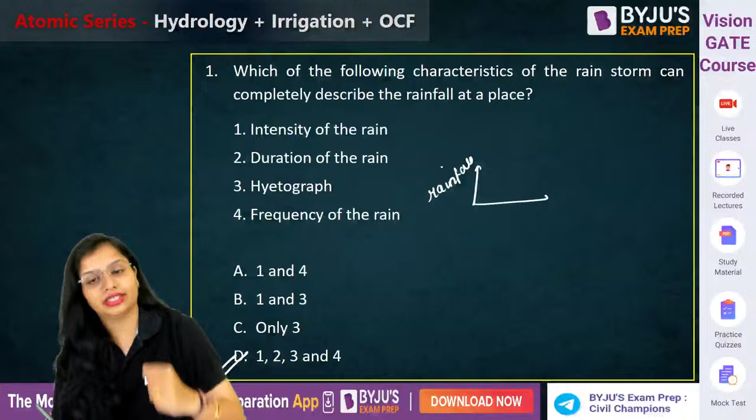Okay, now moving to the next question. This is a calculative question. A catchment has an area of 100 hectares. Runoff coefficient is given to you as 0.4. Generally, runoff coefficient will take it as 0.4. Due to a 5 centimeter rainfall event, the stream flow at the outlet lasts for 10 hours.

It is asking you the discharge, the average stream flow. Come on guys, it is asking you the discharge. That answer is correct. Now give the answer for this. Come on guys, you have to answer, you have to give the BARC, not me.

मेरे को नहीं देना पेपर, आपको देना है. Come on, quick, quick, quick. You have to give the paper, guys, not me.

अब देखो, अगर मुझे stream flow चाहिए, I need to know how much amount of runoff is taking place. In the question, it has given me rainfall. Now you know that runoff coefficient is equal to runoff upon rainfall. Runoff coefficient is 0.4, rainfall is given to you as 5 centimeter. Now this is runoff, I don't need the depth, I need the volume.

So what I'll do is I'll multiply 5 centimeters, converted into meters, by the area, that is 100 hectares. You know 1 hectare is equal to 10 raised to power 4. Solve it, you will get the runoff. How much is it coming? It will come to 2 into 10 raised to power 4 meter cube.

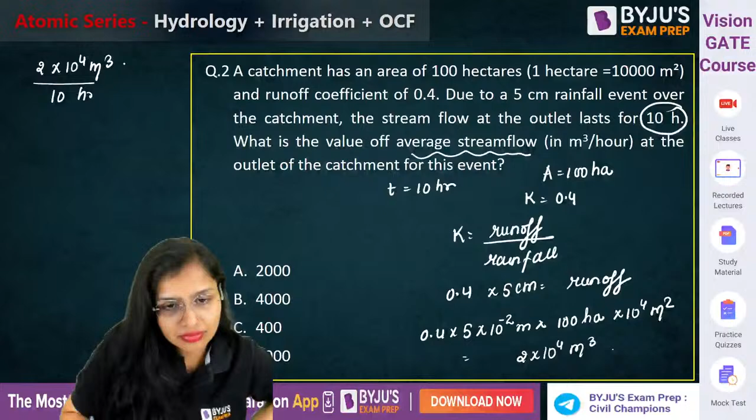Solve it. How much will be the answer coming? 2000 meter cube per hour. As simple as that.

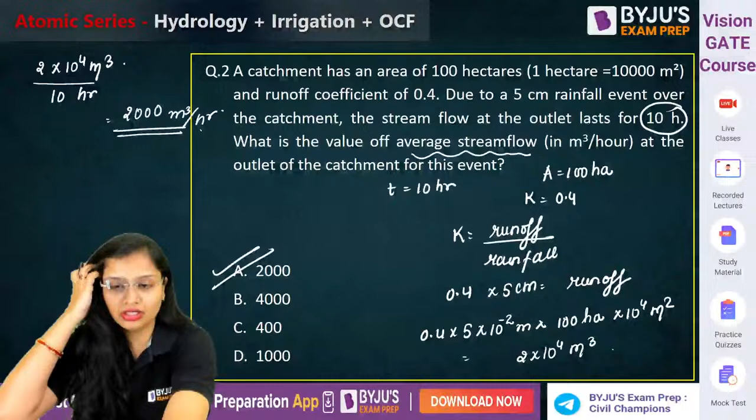So this can be asked, and here you don't need a calculator also. If you have slightly good mathematics, you will be able to solve it.

Now this is a good question. It doesn't have multiple answers. Because in BARC you will be getting only MCQ.

Which of the following curves are true for DAD analysis? Depth, area, duration curves. Come on guys. I told you at a stretch you cannot analyze all three things.

So when you take the variation of two parameters, you keep the other one constant. Come on guys, solve it. Very good Jagriti, very good. So the answer will be both A and C.

Let's check it out. If the area is fixed, and if you are increasing the duration, the rainfall depth will increase. Obviously, if I am talking about 1 hectare area, and 2 hours of rainfall took place, 4 hours of rainfall took place, then obviously the amount of rainfall in 4 hours will be more compared to 2 hours. So this is correct.

Now this doesn't make sense. Now C1, here what is happening? Average rainfall depth and area. Again same thing - when you are increasing the duration, the rainfall depth will increase. So both A and C are correct.

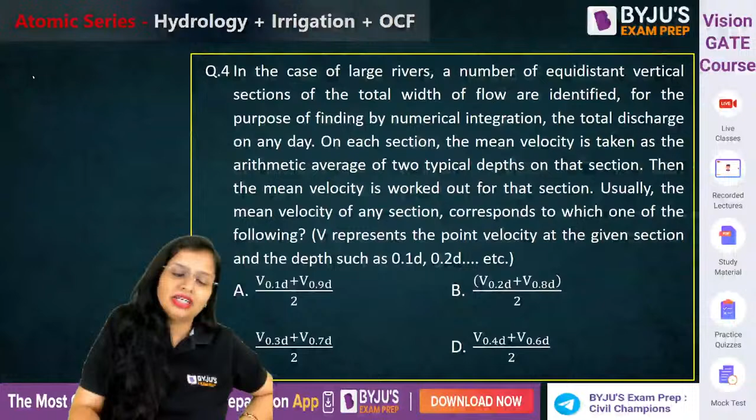Mean velocity is the arithmetic average - at 2 positions you will take the depth and then do the arithmetic average. Now it is asking what will be the mean velocity at a particular section. Come on guys, how will you calculate the mean velocity, or average velocity? I told you for shallow streams, generally when the depth is less than 3 meters, average velocity is given by finding the velocity at 0.6y depth.

And when it is moderate deep streams, you will calculate it at 0.2d and 0.8d depth, take the summation and do the average. So B will be the correct answer. Correct?

Oh my God. It depends - I will never say easier than GATE, difficult than GATE, or equivalent to GATE. I never said it is much easier than GATE. Never. Now this question, this is a good question.

What about option D? You're asking about this one. For option D - A is also correct, C is also correct, Nagesh. B is not correct. If you check it according to this, as you see here, just check it out - if you take the same depth, area needs to be constant for me.

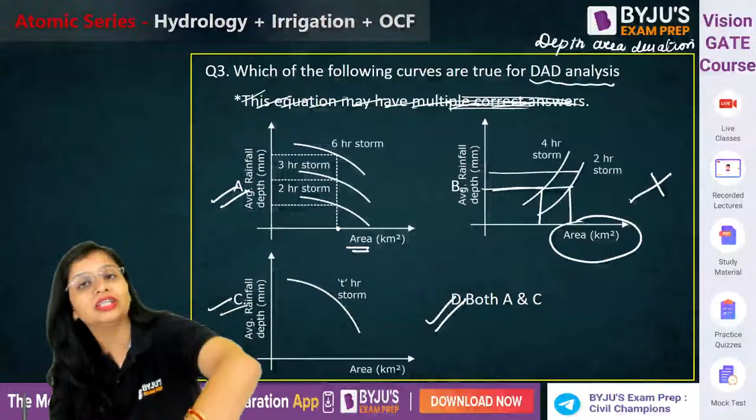Here area is not constant and you're measuring rainfall depth which is also varying, duration is also varying - that's not how it works. You cannot analyze all three things at a stretch. You will keep one thing constant and check the variation of the other two parameters. This is what you do.

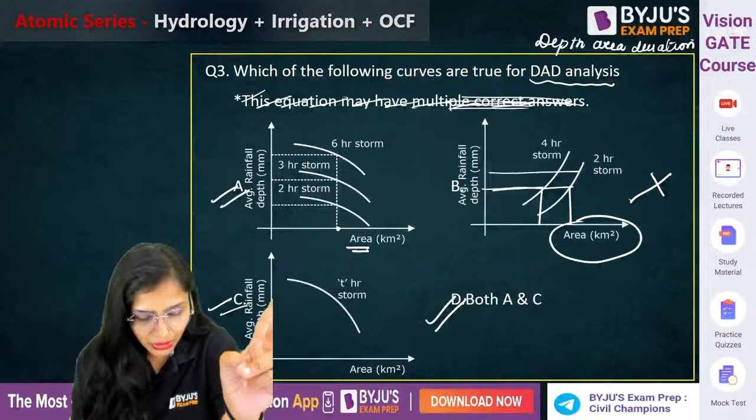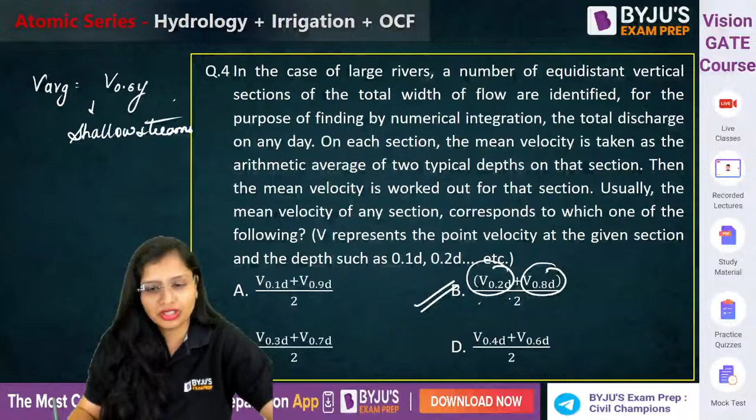In case of D - is D not correct? You calculate at 0.6y depth, 0.2d depth and 0.8d depth. That's not how it works. For shallow streams, this is the one, and for deep streams, this is the one. Option D is never correct.

Now this one - the velocity of the stream flow when measured using a current meter at point A is found to be 5 meter per second, with revolution given as 50 revolutions per second. And at point B, the velocity is 3 meter per second and it is 40 revolutions per second.

The velocity of the stream at a section 50 centimeters downstream of point B, where revolutions is given as 60 revolutions per second - tell me what the velocity will be. This is a very simple question.

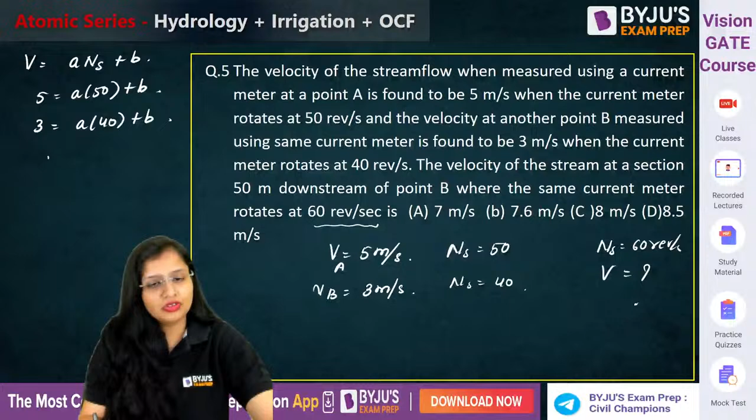Solve it - in the exam also you have to solve it yourself. Also you will solve. Check it out. Give 1/5 and this will come out to be -5. Just check it once.

But it has asked you the velocity when the revolutions is 60 revolutions per second. A is 1/5 revolution, 60 revolutions per second, and this is -5. Solve karo - 60 by 5 is 12, 12 minus 5 is 7.

Simple, this question is simple. Any doubt? Nagesh, Jagriti, any doubt, anybody? Clear? Is this question clear to everybody? Come on, quick, quick, quick.

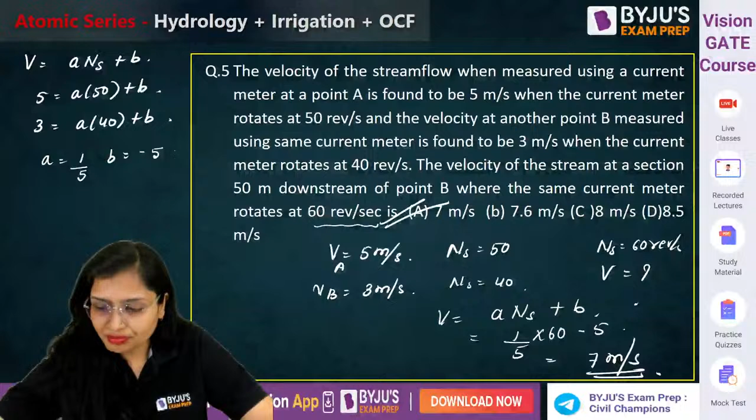Okay then, we'll start with the next question. A catchment has 4 rain gauges installed. Annual average rainfall given to you is 110 centimeter. Standard deviation given to you is 25 centimeter. Error given to you is 0.10.

It is asking you the additional number of rain gauges. Additional means extra, so for calculating additional, first you need optimum. So the formula for optimum is N equals CV upon epsilon whole square.

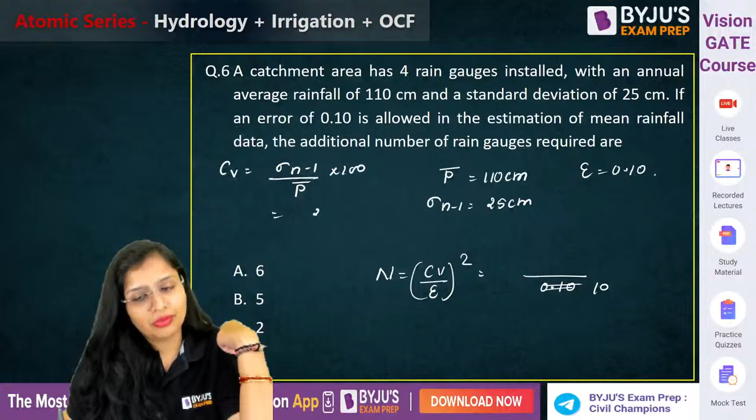Allowable error is 0.10, or if you want to write in terms of percentage, you can write 10%. Now you need to calculate coefficient of variation: 25 divided by 110 into 100. How much is coming, coefficient of variation guys?

22.78. Remember, if I am taking this in percentage, I have to take allowable error also in percentage. Don't do one as percentage and one in decimal - you will get the wrong answer.

So this is 10 and here is 22.78 whole square. How much is it coming? Guys, you have to solve it also. This will come out to be 5.16, so you will round it off to the higher side, that is 6.

So 6 we required, right now we have 4, so how much additional we require? 6 minus 4, that is 2. Correct?

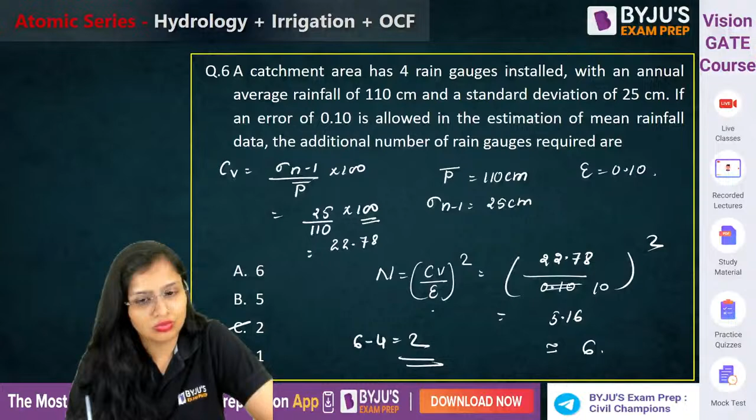Now question 7 - don't have calculators, okay, now this question. Rainfall intensity is given to you in mm per hour, but the duration of each rainfall intensity is half an hour. Now here they have given you the runoff volume and catchment area and it is asking you phi index.

I have told you whenever they ask you phi index, first you need to calculate W index. Now W index, you know, it is precipitation minus runoff by time.

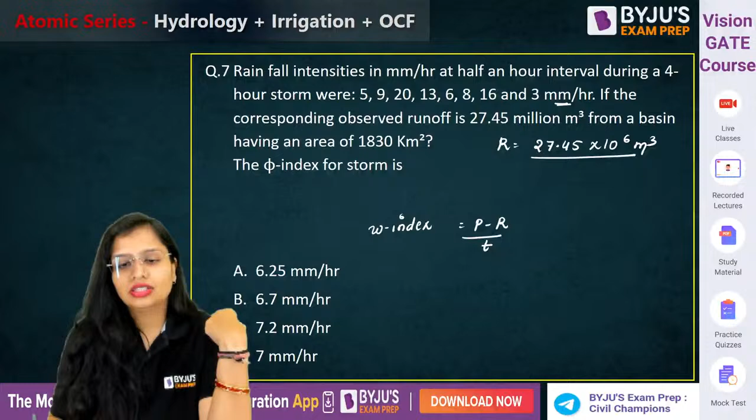So now first let's calculate runoff. 27.45 million means 10 raised to power 6, and 1830 square kilometer - so convert it into meters. Solve it, how much are you getting the runoff? Pehle runoff bata do - solve it and tell me the value of runoff.

Runoff you got, precipitation: 5 plus 9 plus 20 plus 13 plus 6 plus 8 plus 16 plus 3. This is in mm per hour, and duration intervals half hour. Solve it - kisi ka aaya? Precipitation, tell me the value of precipitation also.

80 it will come - half of 80 isko plus karoge. When you'll add it, you will get 80, half of 80 is 40 mm. So W index: 40 minus 15, and how many - 1, 2, 3, 4 - 4 hours. So this will give you the value of W index in mm per hour.

Calculate and tell me kitna aa raha hai W index - pehle aapko W index nikalna hi padega, you need to calculate W index first. How much will it come? 6.25 mm per hour - this is W index.

But in the question, it is not asking me W index, it is asking me phi index. Phi index is hum woh precipitation lenge jo runoff produce karta hai - average precipitation above which rainfall volume is equal to runoff volume. So any value which is less than 6.25, you will not take that.

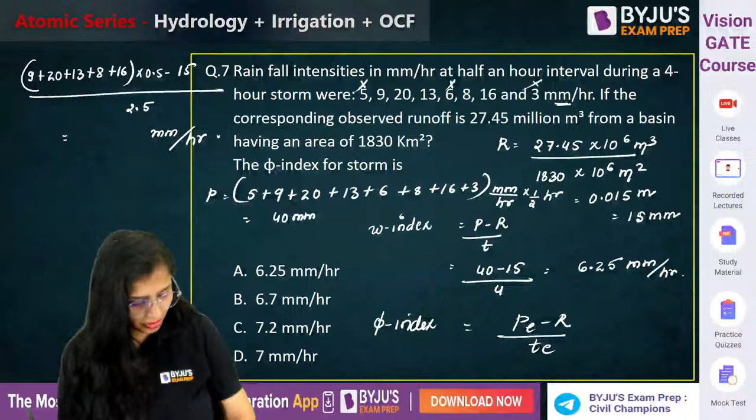Come on, kitna aa raha hai? 563 kya hua - achha usko you are neglecting that. Okay, solve this and tell me how much it is coming. This will come out to be 7.2 mm per hour - is it coming that much? 7.2 mm per hour - isko 0.5 se multiply nahi kiya because it is half an hour interval.

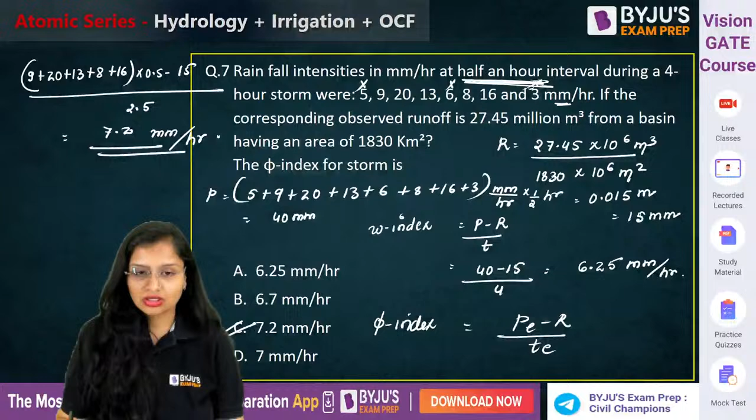Jagriti, sure, okay, now this question - a good question. Come on, solve this question, I'll add one slide by that time.

Chalo. A stream discharge is calculated by dilution technique. If a 25 mg per liter of a fluorescent tracer was discharged into a stream, I'll take it as C2. Some tracer or dye is discharged at a constant rate of 10 meter cube per second.

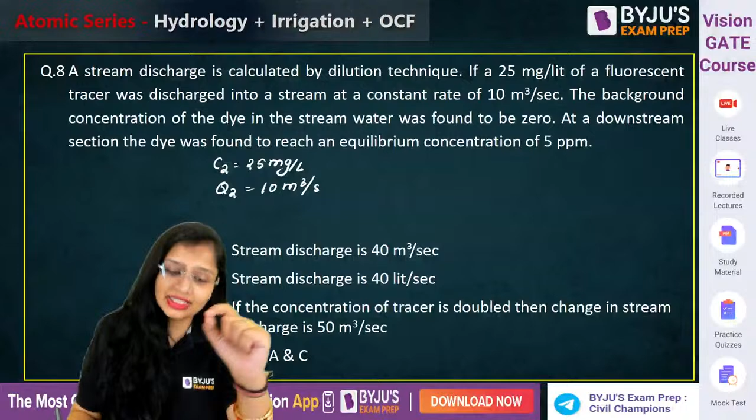And the concentration of tracer which was already present in the stream before is zero. At a downstream section, this is the discharge of the stream which you need to calculate. The concentration of the tracer which is present is 0. Q2 is the rate you are adding and C2 is the chemical.

So here you will get the concentration as C, and equilibrium concentration is given as 5 ppm, that is 5 mg per liter. Firstly it is asking you the stream discharge, meaning it is asking for Q1. Now you know the continuity equation, I can write it here. Q1 C1 plus Q2 C2 is equal to Q1 plus Q2 into C.

Now you know everything, you can just substitute it and you'll get the answer. This will become 0 because C1 is 0. Q2 is 10, C2 is 25, and this is Q1 which you need to find. This is 10 and this is 5. Solve it and tell me the value of Q1. Come on guys, solve it and tell me the value.

Come on, quickly. 5 ones and 50, 50 minus 10, 40. That's how it comes out. It's this simple, so stream discharge is 40 meter cube per second.

It's not liters per second. But here guys, kindly read the question. Now it has played a bit of a game with you. You saw stream discharge is 40 meter cube per second, you're like oh my god I got the answer, and you'll move to the next question. Kindly read statement C.

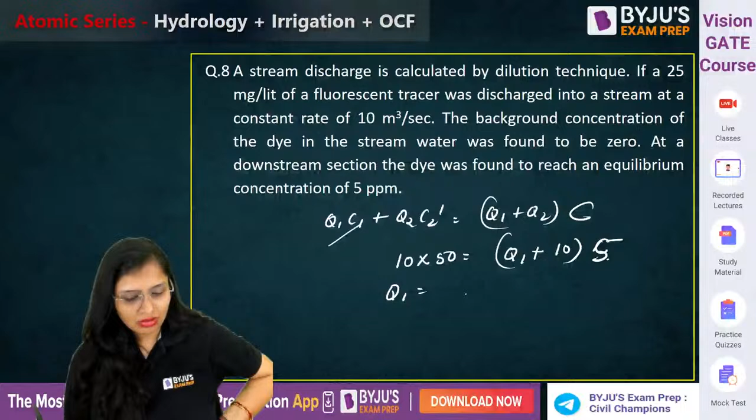Now this will be 0 because C1 is 0. Q2 is 10 meter cube per second, and this is 50. Come on, calculate Q1. Come on, calculate Q1 again, you have to calculate it again. Come on, quick, quick, quick.

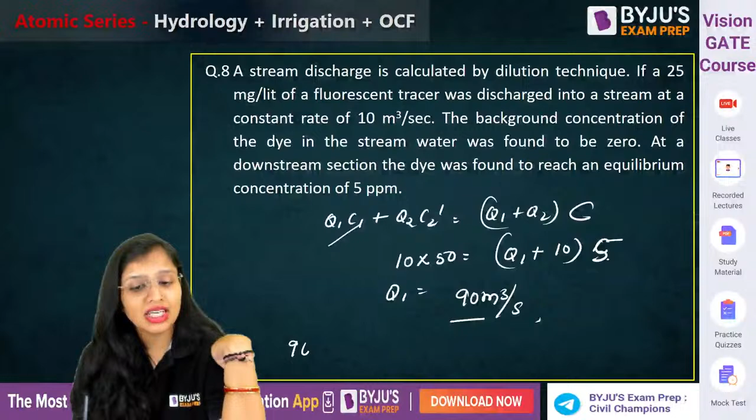This time it will come out to be 90 meter cube per second. Okay, now check it out. Initially it was 40 meter cube per second, right now it is 90 meter cube per second. In the question it is asking you the change in stream discharge.

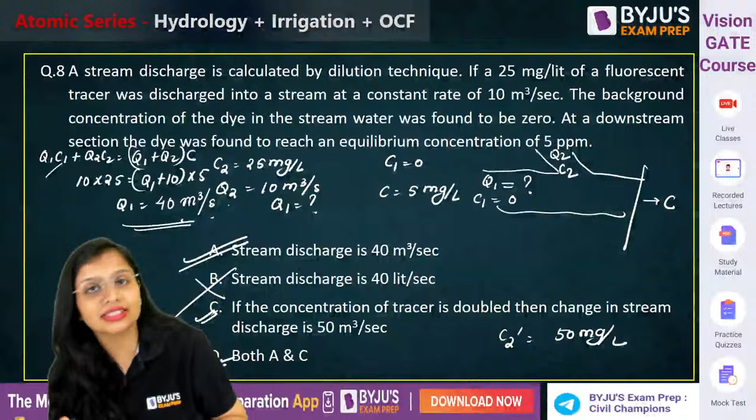So change in stream discharge will be 90 minus 40, that is 50 meter cube per second will be the change in stream discharge. So C is also correct, and I told you we don't have multiple select questions here. So here the answer will be D, both A and C. So guys, this question teaches you that if you are getting one answer as correct, kindly read the other statements also, don't skip that question in a hurry. Otherwise 1 mark will be negative, you won't get the 3 marks and 1 mark will be negative.

Alright, this question: the infiltration capacity of a soil follows Horton's equation, it is given to you. It is asking you first the total depth of infiltration, and then average infiltration rate for the first 40 minutes. So it is asking both things. Come on, how will you do it?

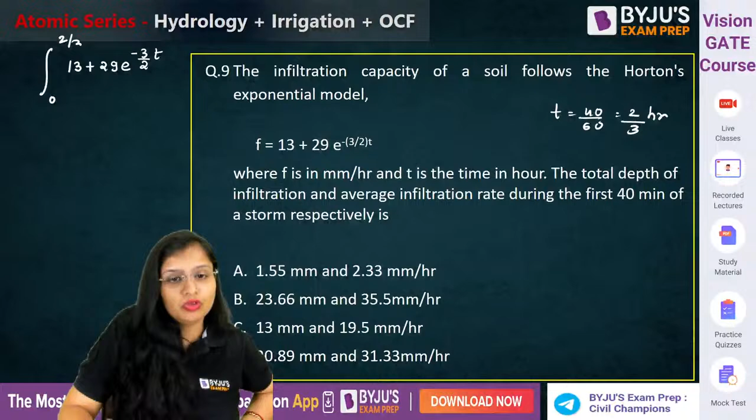Come on guys, first there's 40 minutes, you know everything is in mm per hour. So 40 minutes converted into hours is 40 by 60, that is 2 by 3 hour. So this will become from 0 to 2 by 3 because you need to find the cumulative value, so now you'll integrate this. So integration of 13 dt is t.

Now you should be so pro because I don't think you are a beginner now, right? So you should be able to solve it in a single line. 3 by 2 into 2 by 3 minus...

Come on, solve it, you will get the value in mm. 23.66. Are you sure? Just check it again, 23.66 or 20.89. Check it, Viren, Jagriti, just check it again. 23.66 or 20.89, quick, quick, quick, waiting.

So what will the average infiltration rate become then? Just check it out first.

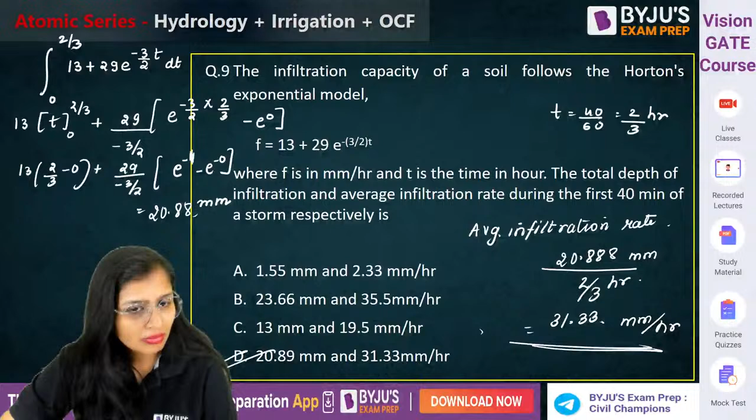An 8-hour storm with incremental rainfall during each successive hour is given to you.

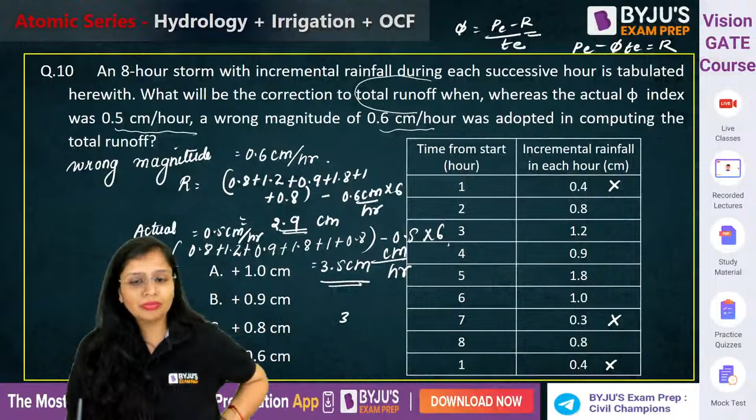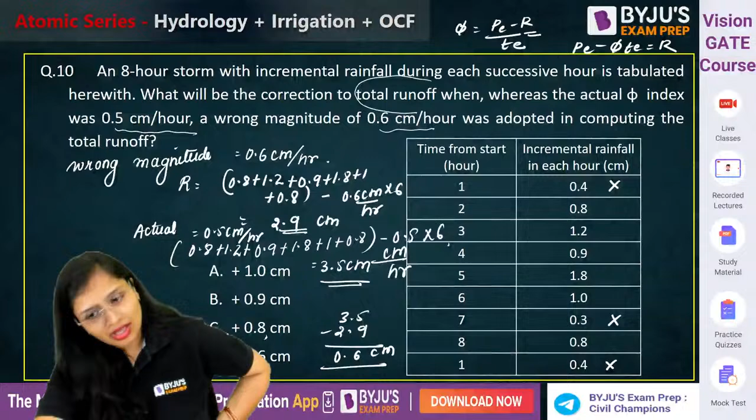Clear? Chaliye. Now moving towards irrigation, then open channel flow is also there and building materials is also there.

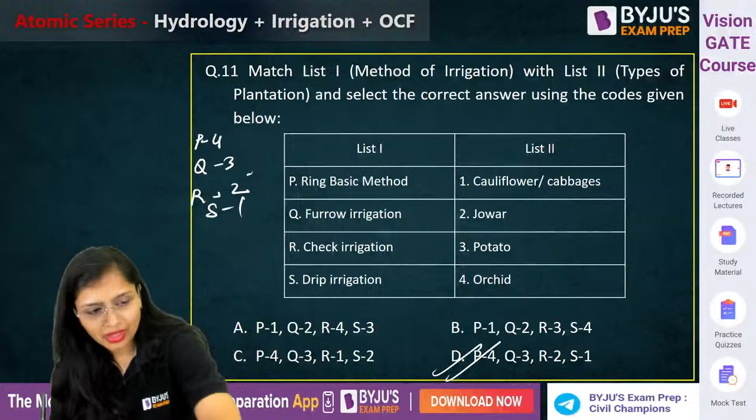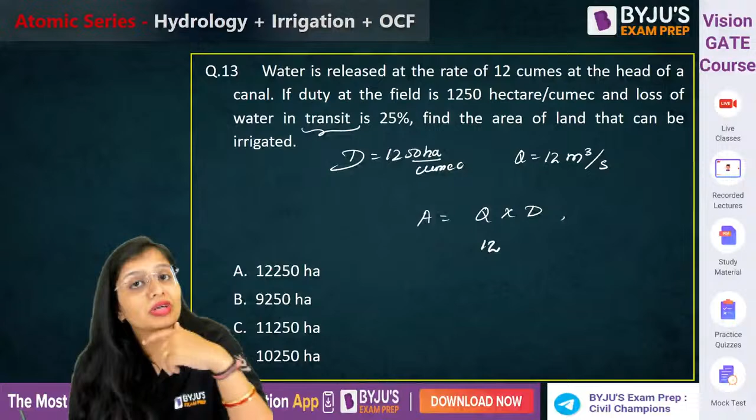See, 12 cumec was released, but 25% is lost. So how much is remaining? 75%. And that will be in meter cube per second, that is Qmax. And how much is the duty? 1250 hectare per cumec. Solve it. How much is it coming?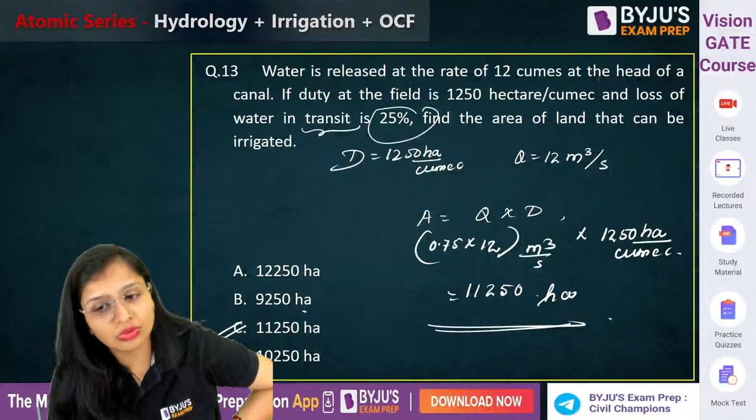Now see, option A and option C look roundabout the same, so beware. C is the correct one. Theek hai, only thing you have to know is that in transit 25% loss happened. So how much will come? 75%. Simple. Now this one.

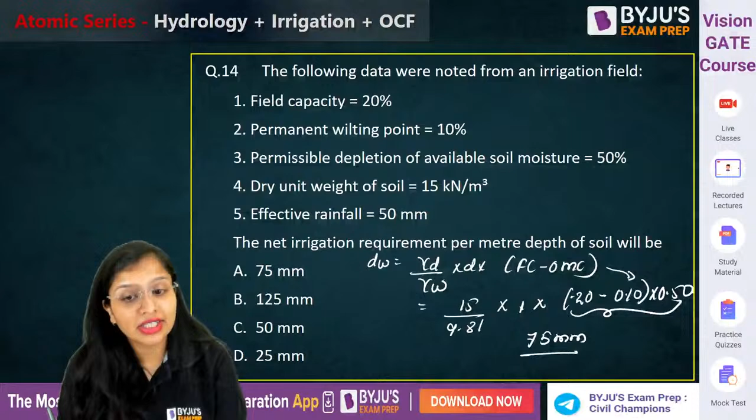But the question has not asked you how much water is required, it is asking you the net irrigation requirement. So 75 mm is required, but during that time rainfall also took place. How much rainfall took place? 50 mm. So how much irrigation is required? 75 minus 50, that is 25.

Correct, Shubham, very good, okay. Now this question, this is simple formula based.

Farmland irrigated by border flooding is divided into a number of strips. Area is given to you as 0.05 hectare. Discharge is given to you as 0.025 cumec. Infiltration capacity is 0.05 meter per hour, and the depth is given to you as 10 centimeter. It is asking you the time required.

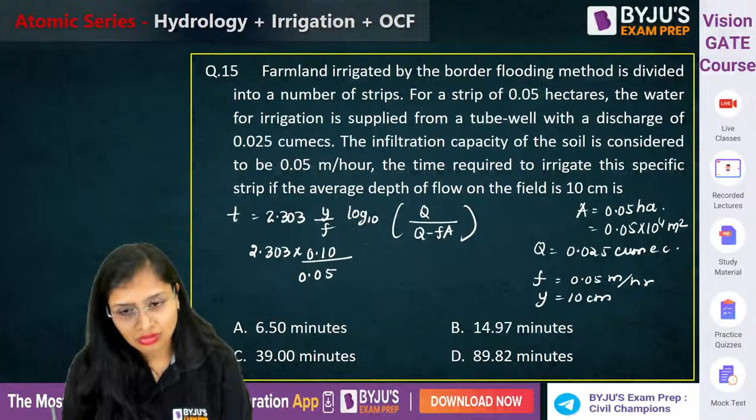Just you have to be cautious with the units, only units matter and nothing else. This 0.025 is meter cube per second, so you can convert it. Convert this into hours, it'll become easy. So I'll multiply this by 60 into 60. So this will come out to be 90 meter cube per hour. So instead of taking 0.025, let's take it as 90.

So 90 minus 0.05 into 0.05 into 10 raised to power 4. First you will get the answer in hours and then convert it into minutes. This will come out to be 0.65 hour. 1 hour equals 60 minutes, so when you multiply this by 60 minutes, you will get it as 39 minutes.

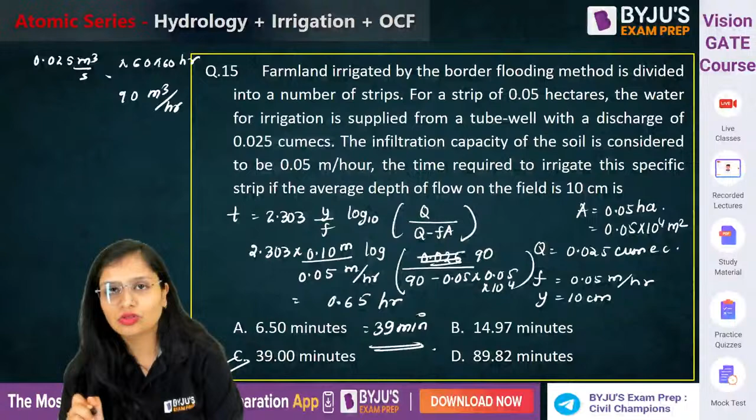Okay, it's formula based, the only thing where you can make mistakes is in the units. There's no scope for any other mistake, only mistakes happen in the units. Chaliye, now this question, come on guys.

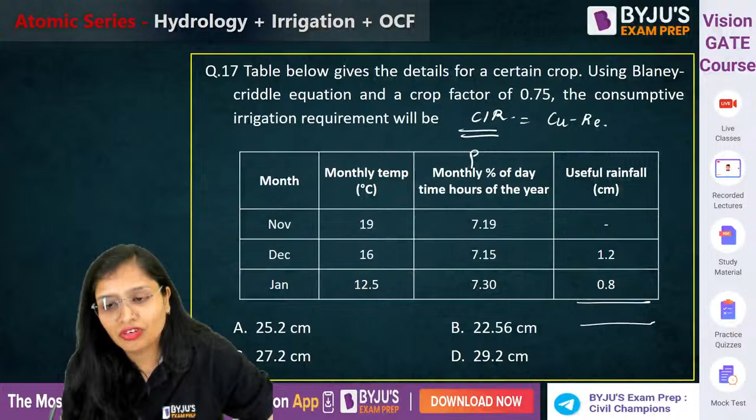What is this question saying? A table is given to you for November, December, January. The percentage daylight hours is given to you. It's asking you for consumptive irrigation requirement. You know that consumptive irrigation requirement is consumptive use minus effective rainfall. Effective rainfall from here will come out to be 2 centimeters. Now first you calculate the consumptive use. Consumptive use formula is given by Kp by 40, 1.8T plus 32, where temperature will be in degree Celsius. Solve it guys, how much does it come to?

First just calculate F so that you don't have to multiply K again and again. So P by 40, 1.8T plus 32. Solve it, how much will you get? You'll have to solve it one by one. First it will be like 7.19 divided by 40, 1.8 into 19 plus 32. Solve it like this. How much will it come to? First it will come to 11.9.

Then substitute the value of P as 7.15 and substitute the temperature as 16. You have to solve it again and again like this, you don't have any options, you have to do it. You'll get 9.946. So solve it, add it. How much will you get? 32.74, this is the value.

So from here, if you want to calculate consumptive use, it becomes K into F. Crop factor is given to you as 0.75 into 32.74. Solve this, you will get it as 24.56 centimeters. Come on guys, calculate it. Now you are using a calculator, but make sure you have the habit of using a virtual calculator also. 24.56 minus effective rainfall, that is 2 centimeters, so here you will get 22.56 centimeters.

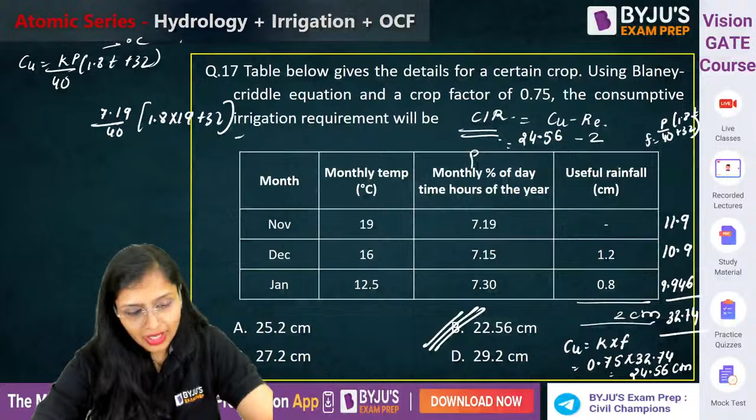Clear? Next question, this is again a good question. Leaching requirement is given to you. How much water is lost due to evaporimeter is given to you. Rainfall runoff pan coefficient is given to you. The question is asking you net irrigation depth in centimeters.

Come on guys, from 24.56 you need to subtract the effective rainfall also, by rain. Yes, correct. Now this one, question 18, this is a good question, solve it.

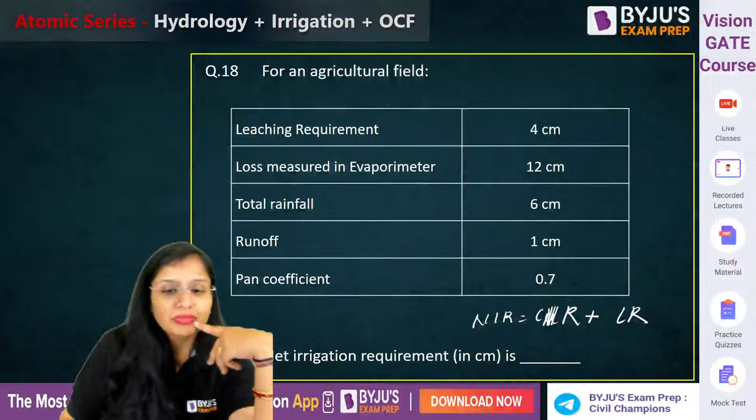Net irrigation requirement asked. Net irrigation requirement first becomes consumptive irrigation requirement plus pre-sowing requirement if any, plus leaching requirement. Consumptive irrigation requirement I just told you, consumptive use minus effective rainfall. Now solve this, first you need to find out consumptive use. This is a good question, solve it, I'm not going to do it.

Consumptive use here, Blaney-Criddle method won't easily be used. Here it is given to you how much water is lost due to evaporation, 12 centimeters. How much is the pan coefficient? 0.7. So how much are you getting here? 8.4 centimeters, this is the consumptive use. Minus effective rainfall, which is the one going inside the ground. Total rainfall is 6 centimeters, runoff is 1 centimeter. Can you tell me how much the effective rainfall will be?

Effective rainfall here means the water going inside the ground which will be used by the crops. So here effective rainfall will be 6 minus 1, that is 5. So 8.4 minus 5, this will come out to be how much? This will come out to be 3.4.

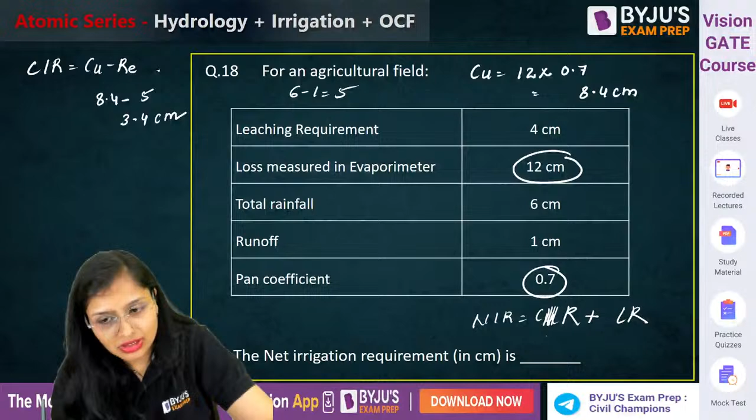Okay, now this is 3.4 centimeters and leaching requirement is 4 centimeters. So here it will become 7.4. Clear? So this will be the answer. And you can solve this in hardly 2 to 3 minutes, you don't even need a calculator for this.

Okay, now open channel flow. One question I have given you as homework, this is a very good question, kindly solve it. If you're not getting it, tell me, I'll give you the answer. You will solve it once at least.

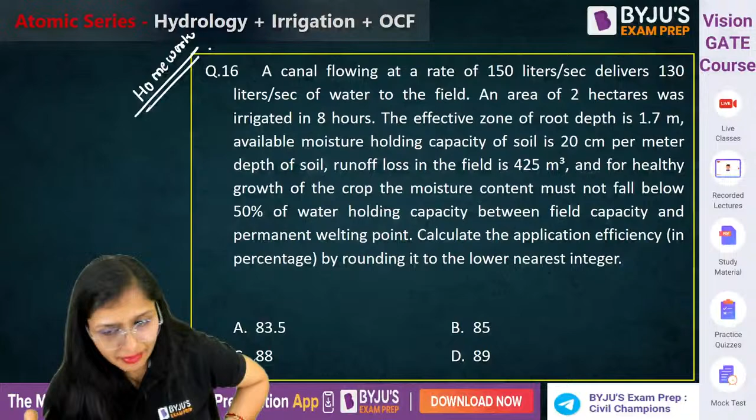Yes. I'll tell you the answer. Okay, this is C, answer is C. Now you solve it yourself, you'll get the value. Round it off to the lower nearest integer, 88. Just solve it once. If it doesn't work out, you already know my telegram group, just message me there, I'll do that.

Alright, now this question, question 19. Solve it, I'll bring water for myself, I'm thirsty. Solve this, it's an assumption question.

Which of the following statements regarding hydraulic jump assumptions is correct - which assumption is correct for rapidly varied flow? Come on guys, answer this quickly. Which of the following statements regarding hydraulic jump assumptions? Do you know the assumptions before and after the jump? See this.

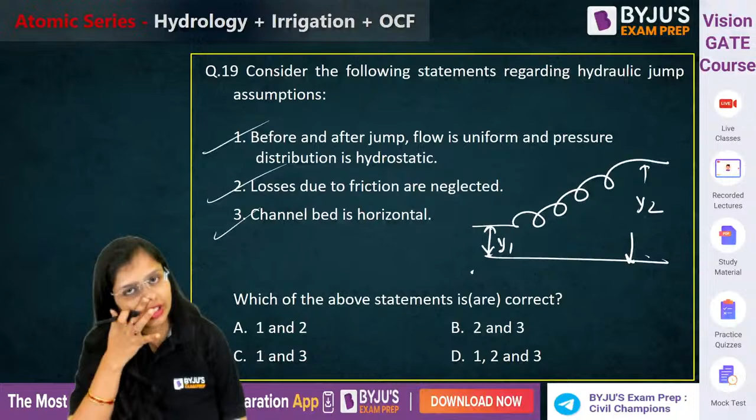This is the initial depth. This is the final post jump depth. Before and after the jump, you assume pressure distribution is hydrostatic. Correct, losses due to friction are neglected. We assume the channel bed is horizontal, and that is why when you get Belanger's momentum equation, you call it a horizontal frictionless rectangular channel. So all the assumptions are correct.

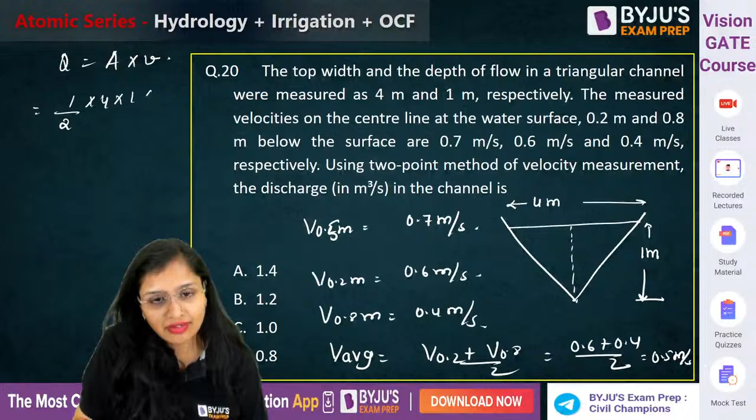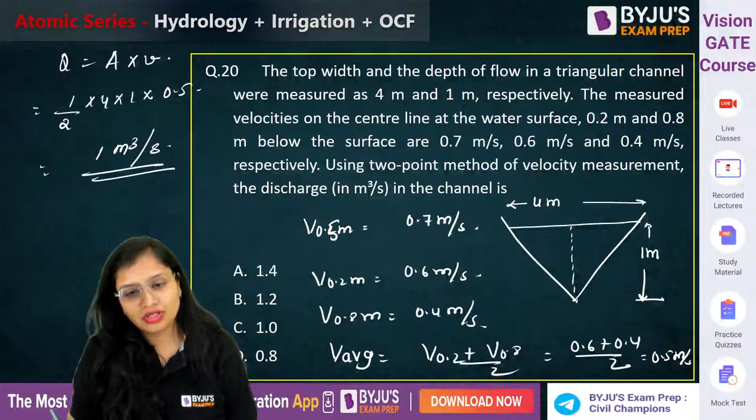You need to calculate the discharge. Discharge is area into velocity. Area of this triangular half base into height, and velocity is 0.5. How much will it come? 2 ones are 2, 2 twos are 4, 2 into 0.5, that is 1 meter cube per second. This will be the discharge. Simple. Okay, next question.

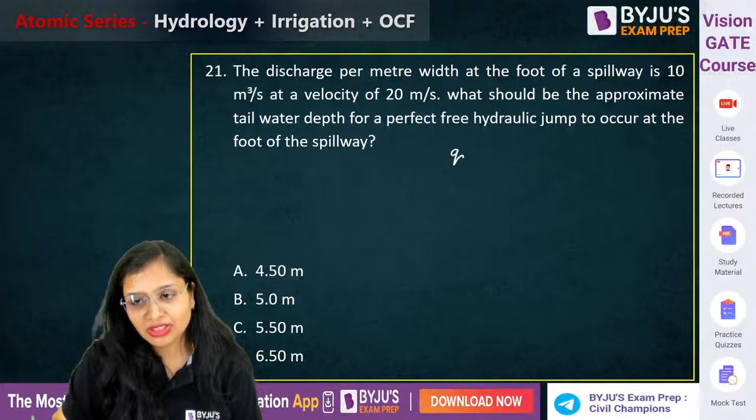The discharge per meter width, small q, is given to you as 10 meter cube per second. Velocity is 20 meter per second. Now it is asking what should be the approximate tail water depth for a perfect free hydraulic jump to occur at the foot of the spillway. Let's calculate. A similar question came in GATE's afternoon session this time too. Come on, solve it.

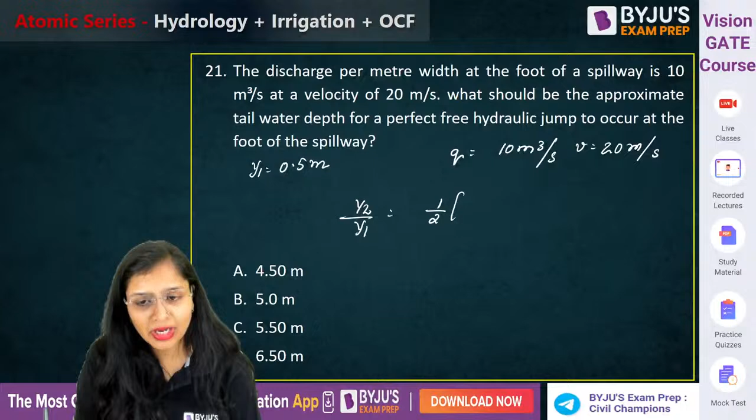Now you need to calculate y2. So you will apply Belanger's momentum equation: 1 by 2 times [-1 plus root over 1 plus 8 Fr1 square]. Y2 divided by 0.5 equals 1 by 2 [-1 plus root over 1 plus 8 Fr1 square].

Now you need the Froude number. Froude number, as you know, is equal to V1 over root of G times Y1. V1 is 20, root over 9.81 into 0.5. Solve it and tell me. It will come out to be 9.05.

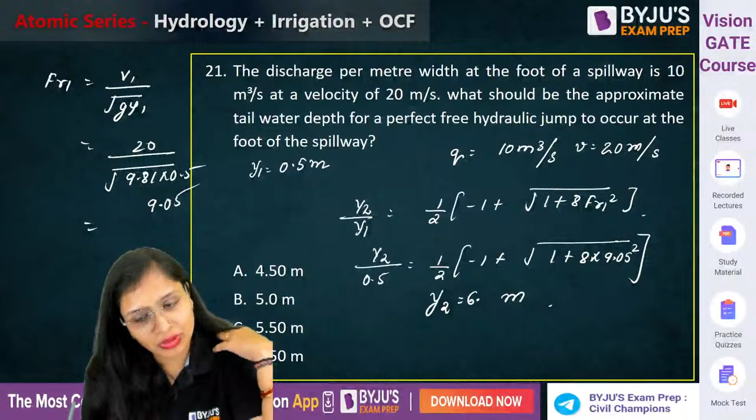Just check the calculations yourself, and multiply by 9.05 square. From here you will get Y2. How much is Y2 coming to? Y2 will come out to be 6.15 meter. Just check it. There is no option related to 6.15, but your roundabout option is around 6.50, so we'll take that.

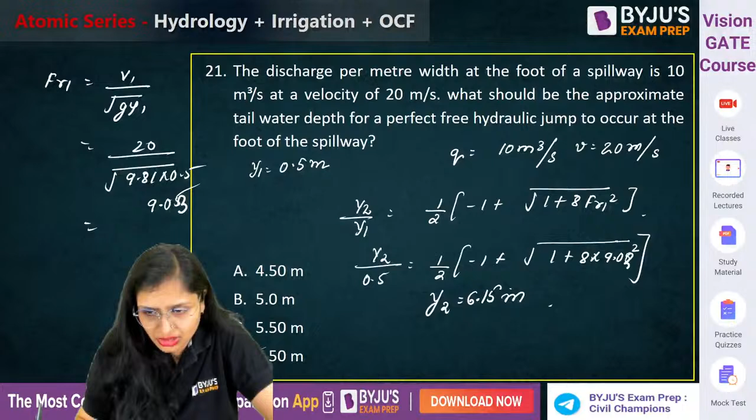9.03 is coming, let me check. Excuse me. 9.0304 is coming. Yes, still the answer will come out around that. Oh, Mayank is there today.

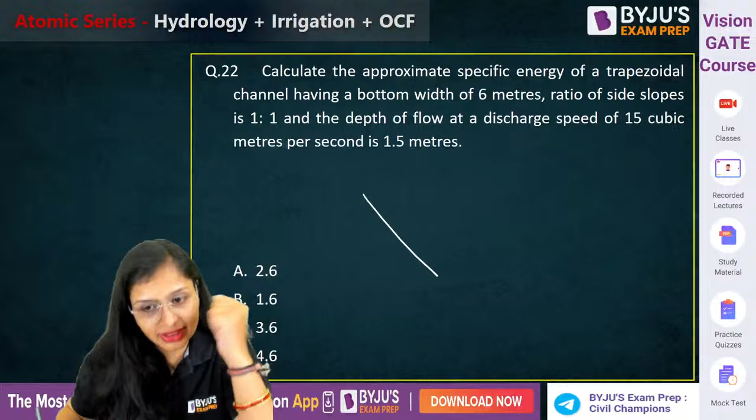Correct, fine. Now calculate the approximate specific energy of a trapezoidal channel. Generally trapezoidal specific energy is not asked, but this question has asked it. Bottom width is given to you as 6 meters. Side slope is 1:1. Discharge is 15 meter cube per second. And depth is 1.5 meters.

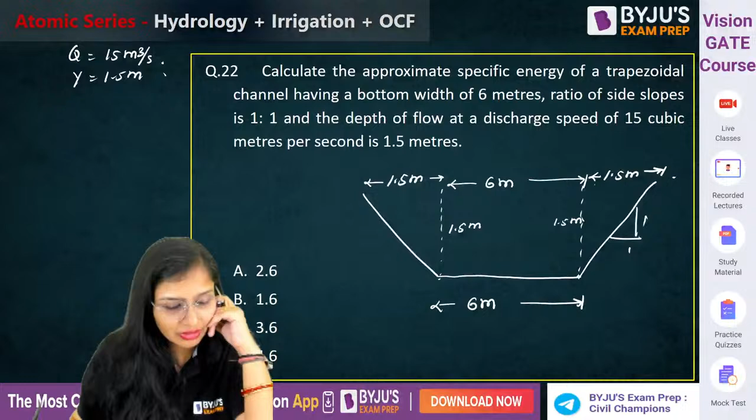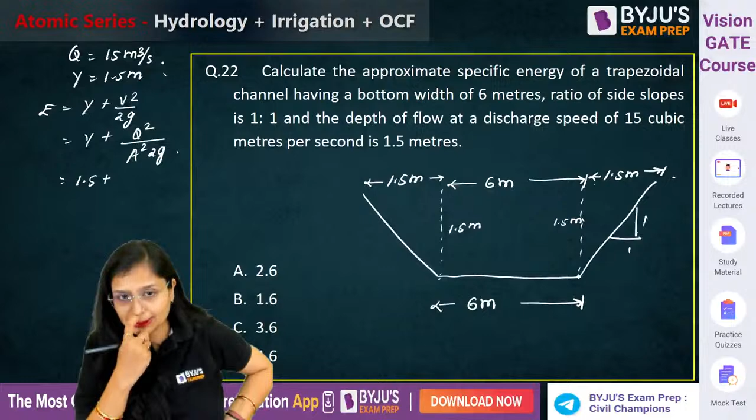So this side will also be 1.5, this will also be 1.5. Now calculate the specific energy. Specific energy is Y plus V square by 2G, which is Y plus Q square by A square 2G. Depth is given as 1.5, discharge is 15, so Q square, acceleration due to gravity is 9.81. You just need to calculate the area.

Now, area of a trapezium is given by half sum of parallel sides into distance between them. Here, 6 plus 1.5 plus 1.5 is... wait, taking side slope 1:1, so it's 6 plus 3, into distance between them which is 1.5. Calculate this area and substitute it here.

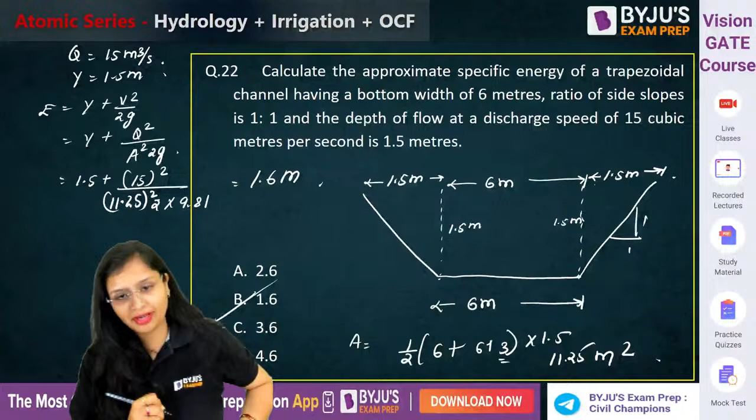Come on, how much specific energy are you getting? Solve it. Just check it out, it is 1.6 meter. Check it once. So in this question, the only thing you need to know is the area. There is nothing more to it, nothing rocket science. I already told you this.

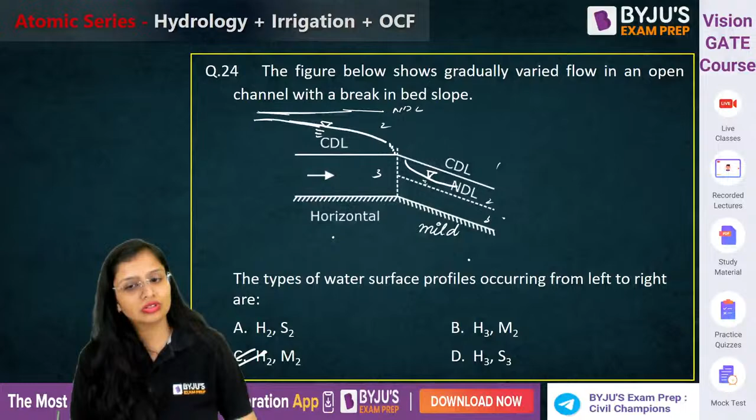Now what will this be? Flow starts from NDL. Zone 2 is a falling flow profile towards CDL. So dash dash, then falling profile, this one. So this will be H2, M2. Second zone here also, and here also zone 2. So H2, M2, correct?

Now, talking about building materials, what is the content of silica in Portland cement? You guys should be able to answer these questions without needing me.

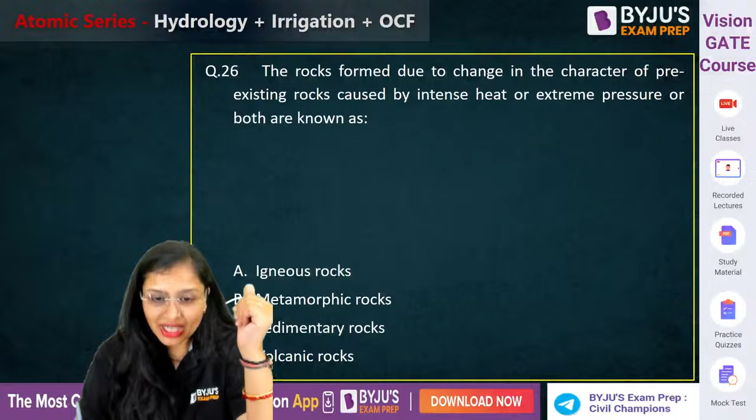So, specific surface area of ordinary Portland cement kisse kam nahi hona chahiye? Is not less than. Specific surface area is the total surface area in square meter of all cement particles in 1 kg of cement. Come on guys, kisse kam nahi hona chahiye? 225 meter square per kg. Correct, Yogendra sir. Chalo, next question.

Which of the following is a stratified rock? Wo rock jisme cleavage ho, ya basically you can say a plane of stratification hai. Come on guys, isme se kaun sa stratified rock hai? Sandstone is a stratified rock. So D will be the correct answer.

Now this one - setting time of cement decreases. Agar aapko setting time ko decrease karna hai, kya add kar sakte ho? If you want to decrease the setting time of cement, this is an easy question. Setting time of cement, if you want to decrease, what can you do? Correct, very good Yogendra - calcium chloride daal do. Setting time decrease ho jayega.

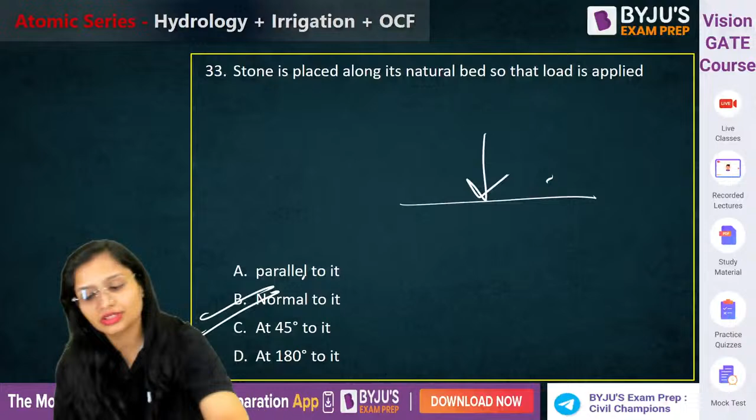Correct? Now this one, this is easy. Kindly tell me this one. Slump test for concrete is carried out to determine - slump test kyon karte hain? You might have done it in your college also. It is to determine workability, simple.

So this one - Deval attrition test is used to determine which of the following? Attrition test. Correct - aggregate abrasion value, correct. Percentage wear nikala hota - kitna loss hua divided by initial weight into 100. So this will give you the aggregate abrasion value.

Now, if P is the standard consistency of cement, the 0.85 amount of water kis cheez ke liye use hota hai? 0.85 is used for what?

0.85p is used for what? It is a very common question. It is used to determine the amount of water required to determine the final setting time of cement.

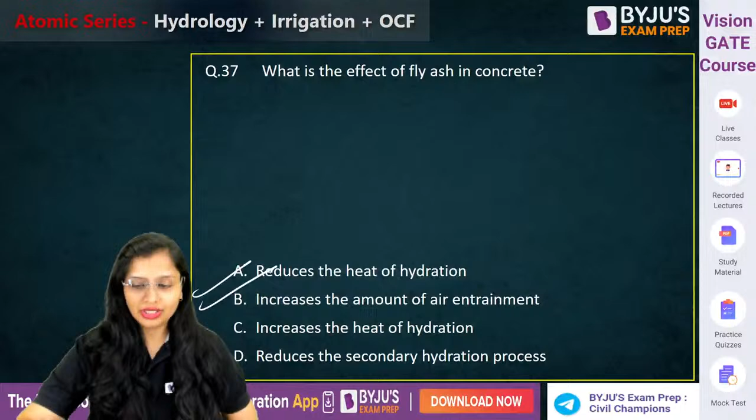Okay, next one. Identify this portion of the brick, you will do it yourselves, I won't do it, tell me the answer. Identify the given portion of brick, quick. Correct, very good, Nagesh said it correctly, Devanshu also. This is queen closer. Later I will show all the shapes together and explain king closer, queen closer, everything.

Now this one: the decomposition of felled timber caused by fungal attack, what do you call that? Quick. Guys, building material is a high weightage subject for your BARC examination, remember that. Correct, you call it dry rot.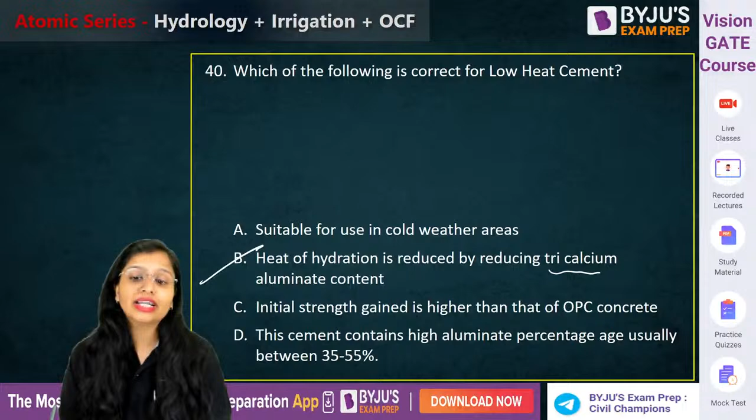Now, which of the following is correct for low heat cement? Tell quickly. If you talk about low heat cement, if you need to reduce the heat of hydration here, what you do is reduce the C3A tricalcium aluminate content. So option B is correct. Absolutely correct, Yogendra. Heat of hydration is reduced by reducing tricalcium aluminate, reduce the C3A content and heat of hydration will reduce.